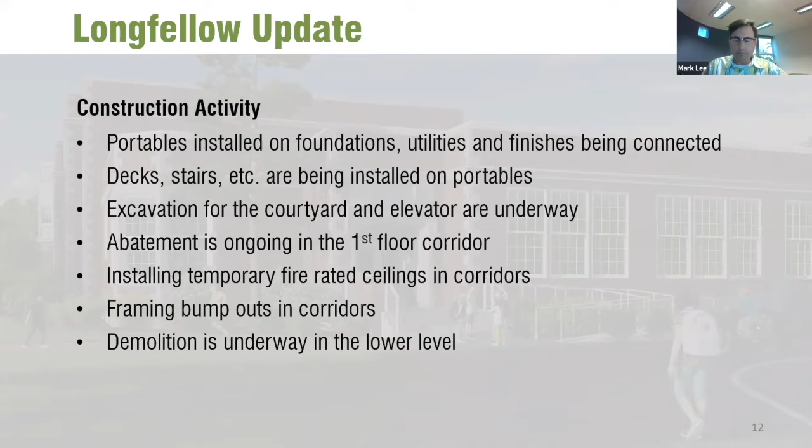You can see on the floor they've got protection on top of the floor itself, and you can see the workers in the corridor. When school gets back in session, they'll have tiles in that ceiling system, so it'll look like a suspended ceiling system.

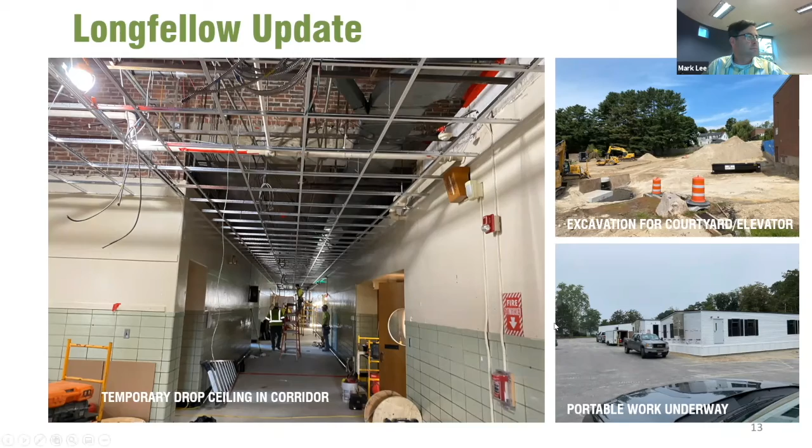Okay, go ahead. Following up on that, the permit status of the portable permit - in order for us to place those portables and get those ready for the start of school and get all the utilities in and inspected, that was received, and that's why we're at this last stage of it. But the building permit is still ongoing for the full construction project at Longfellow.

As part of that, there are phases of the project. What we're doing right now is working with the city plan review department to make sure that this first phase of having students in, that the building is safe and secure for that. In addition to looking at the overall building project, we're also looking very carefully at this first phase of getting the students back in, now that there's been some work done, that the corridor, as you had seen, has been opened up and work has been proceeding inside of the building. So we have to make sure that the building's safe.

We're working through a list of comments that we have been going back and forth with the city plan review department on. One of those was an existing item, just to highlight a few of those - one important decision was an item we had to look at with the city.

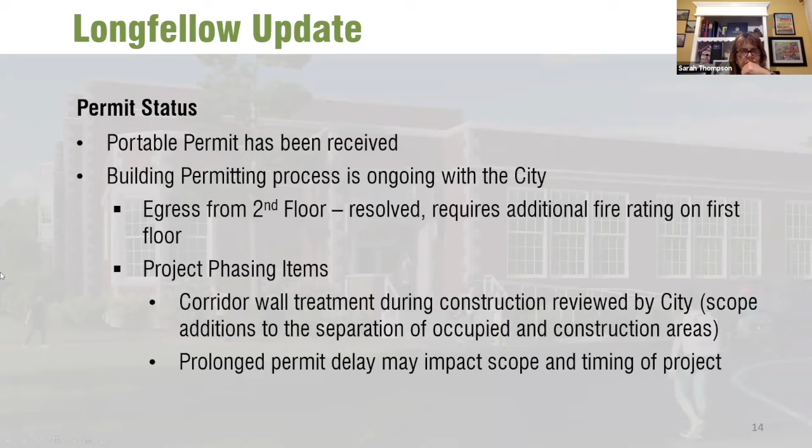Okay. Reiche construction activity: the portables likewise have been installed on the foundations and they're being connected and inspected. Walkways around the portables are being established. Excavation for the addition has not yet started at Reiche, unlike Longfellow. There are about several weeks between when we bid and awarded Longfellow versus when we bid and awarded Reiche, so we see a bit of separation in terms of the construction activity.

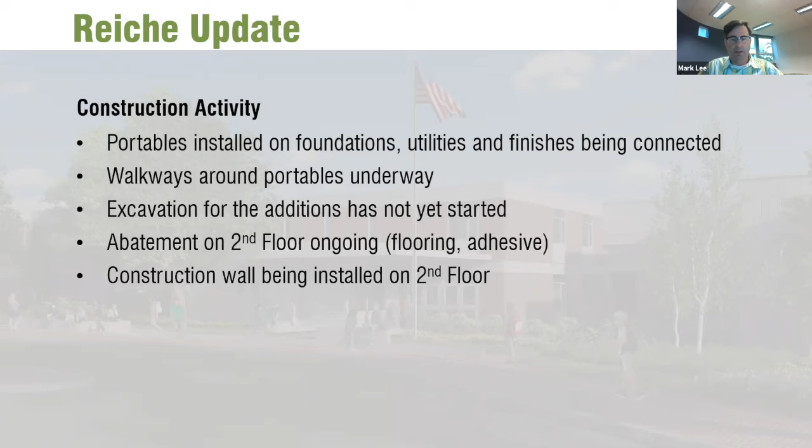I think we're good, Mark. Thank you. So I think one of the exciting aspects is to actually see what will become walls and eventually no more waffle slab. It's more than exciting.

Exactly. On permit status, the permit for the portable was received, which has allowed us to move forward with that. With the city, some of the issues we've been working through are the rating between the new addition for the admin area and entrance, and the separation of that from the existing building. That was something we worked through, the level of rating that would be required for that joint between the two.

We're finalizing some of the details on that. The building of this construction type is restricted in terms of how large it can be, and by putting an addition onto it, we have to almost create that addition as a separate building. So the separation between the two buildings is what we're detailing and working through with the city in terms of exactly what they're going to require.

With respect to the phasing we're reviewing, the original idea was to have some amount of work done this summer as phase 1, and then move into phase 2 in the fall. We've restructured, or are in the process of restructuring, that phasing with the contractor.

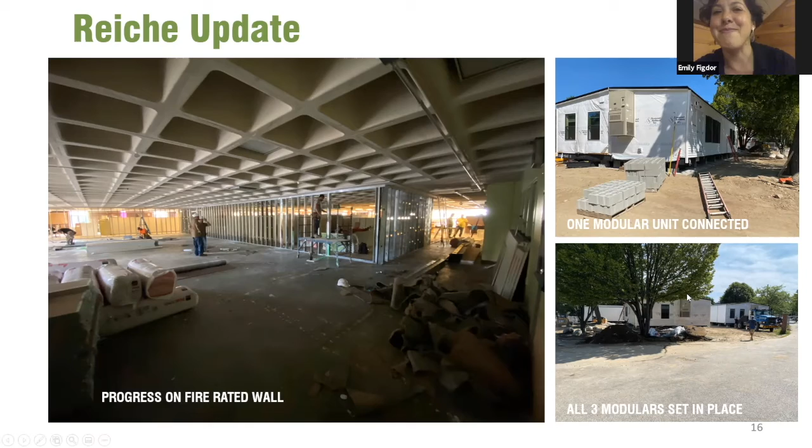The last project that was awarded is the one that's further behind in terms of progress. Site work has commenced at Presumpscot to a degree. We've got some concrete structures that have been brought over for the stormwater system, and if anyone's been over to the site, they've seen those starting to be delivered, as well as some tree cutting that occurred.

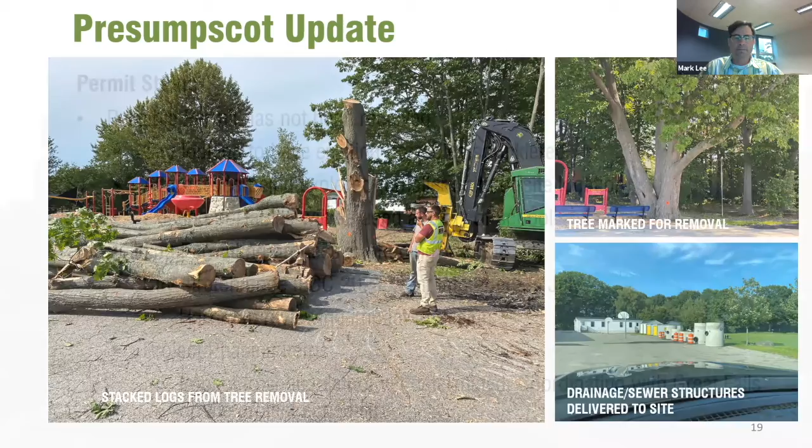At Presumpscot, we have a different case with respect to the portable permit. We do not yet have the portable permit, as we do with Reiche and Longfellow. There's an aspect of the code that has most recently changed with respect to some of these aspects of the portables themselves, which we have to address. Right now we're looking at it -- if we move them now, they have to be sprinkled, which means we have to get a water line out to them.

And then install a sprinkler system. So right now we're just considering some alternatives to the complexity of having to install a sprinkler system for the existing units. We all remember there are 3 existing modular classrooms that we're intending to relocate on the site and continue to use, just in a different location.

But because of the requirement to sprinkle them, we're considering using a different space, leased space off site, so that we wouldn't have to use the portables at all, or consider smaller ones that get around the requirement to sprinkle the modular units. Those are still being actively considered right now. We've got all 3 options coming along at the same time.